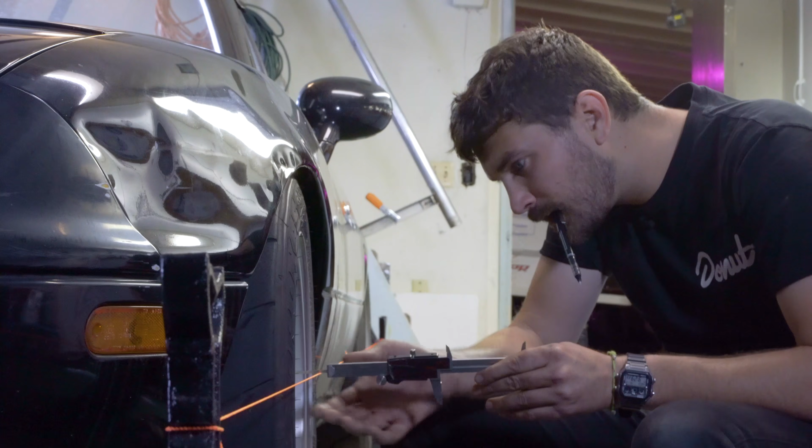It may seem like a pretty small thing, but alignment is so important in affecting how your car behaves. Is it squirrely? Is it darty? Does it pull to the right? Not only that, it affects how long your tires last and how much grip you actually have, and even your fuel economy. A lot of people think that it's really complicated, but it's not. It's actually pretty easy. It just takes a little time and understanding to perfect it and get it just right.

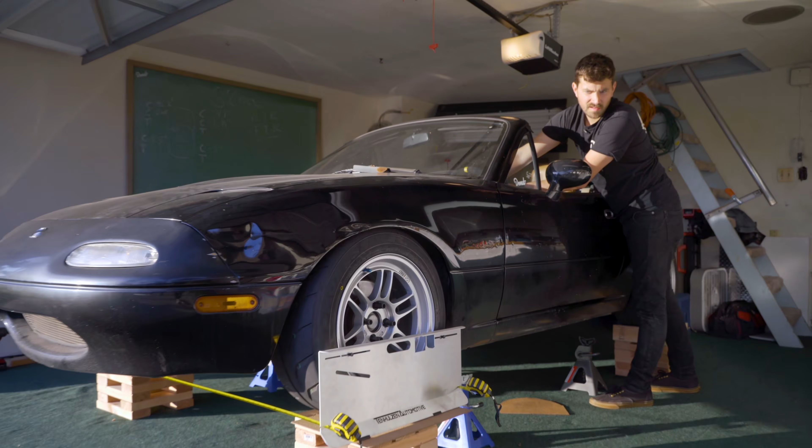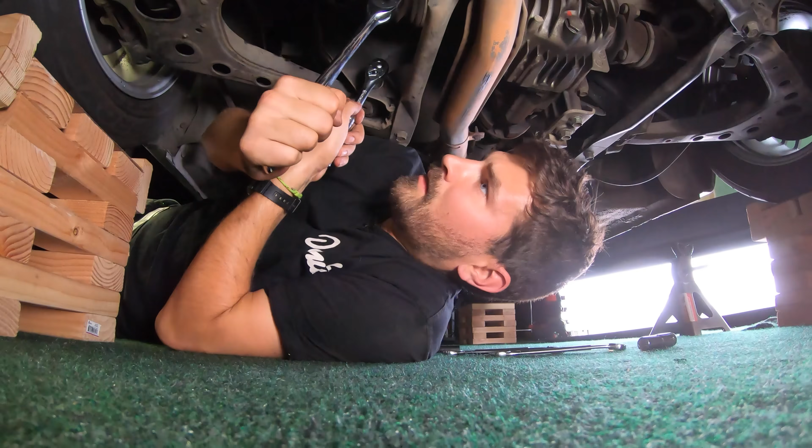So in this episode, I'm going to show you exactly how to do just that. I'm going to teach you how to do an alignment on your own. So along the way, we'll explain the different things that we're adjusting, like the camber, caster, and toe, which I'm sure you've heard of before. We'll talk about why you adjust each and what effect tweaking each one will have on your car, especially in a performance sense.

But I'm very excited because this is going to be a little bit of a learning experience for us both. I've done plenty of in-shop alignments on alignment racks, but this is my first garage alignment, so it's going to be a little bit of a learning experience, and I'm excited for it. And by the end of this video, we're both going to be alignment wizards.

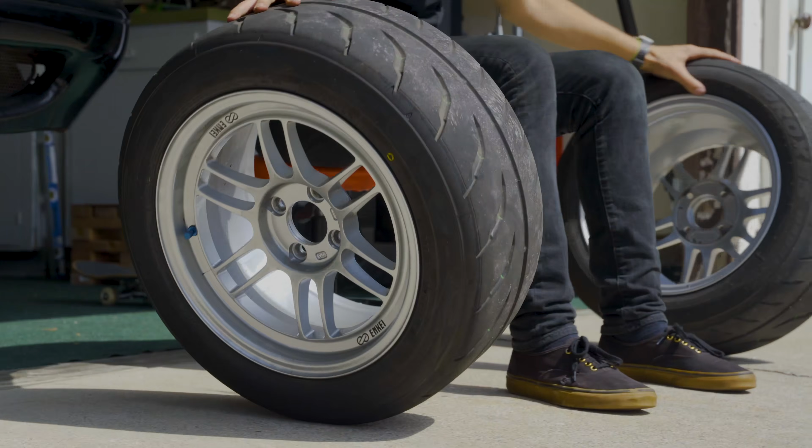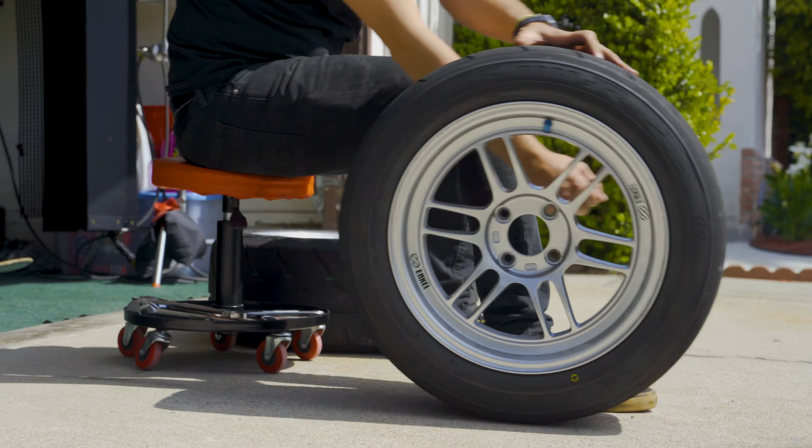All right, so alignment. The basic concept is aligning your suspension to affect the angle at which your tires contact the road. All right, we're talking like this. This is camber. And we're talking like this. This is toe. And then we're talking like this for caster. If you imagine that my arm is the steering axis, or the axis that your steering pivots around, we've got positive caster up front. If my arm's the steering axis, to negative caster. Got it?

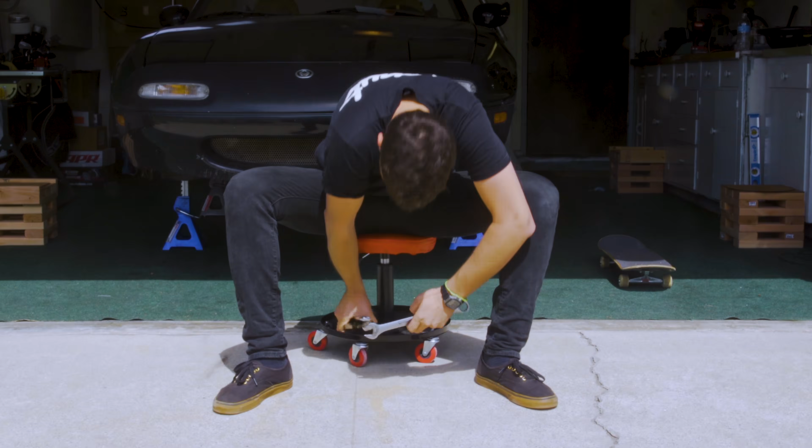Okay, so what kind of tools do you need to perform an alignment at your house? Usually, maybe some sockets and a socket wrench, some wrenches of the regular sort, and an adjustable wrench can be your best friend when you're doing alignment stuff, because a lot of these parts are going to be a little big. All right, so the hand tools are pretty basic, but in order to measure the alignment angles, you're going to need some specific tools of some sort or another.

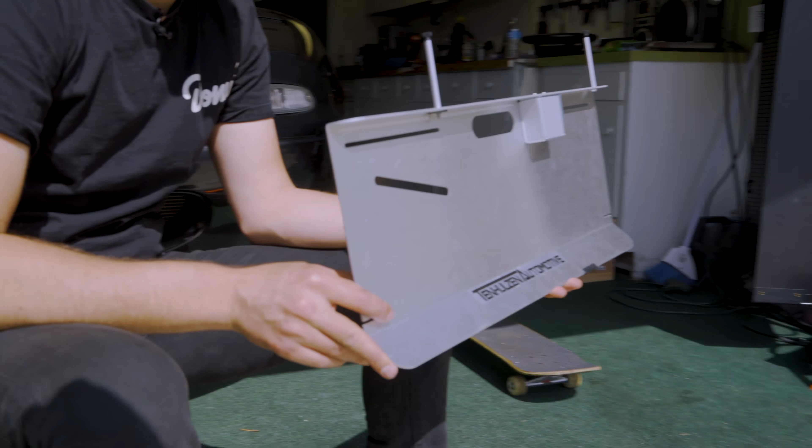So first, I bought these on Amazon. These are camber, caster, and toe plates. So these will measure all three of the alignment angles, and they're only about 200 bucks. So these should be pretty nice. Now, for measuring toe, well, you can make a set of toe plates, or you can also use string.

Something that you need to think about when you're making alignment adjustments is that your car needs to be loaded when you make the adjustments, which means it needs to be sitting on its tires like it normally would be. So how do you do that and get under the car and make adjustments? Well, in my case, I went to the old Home Depot, bought some lumber, and made some stands like this. Pretty rudimentary, but I think they'll do the job.

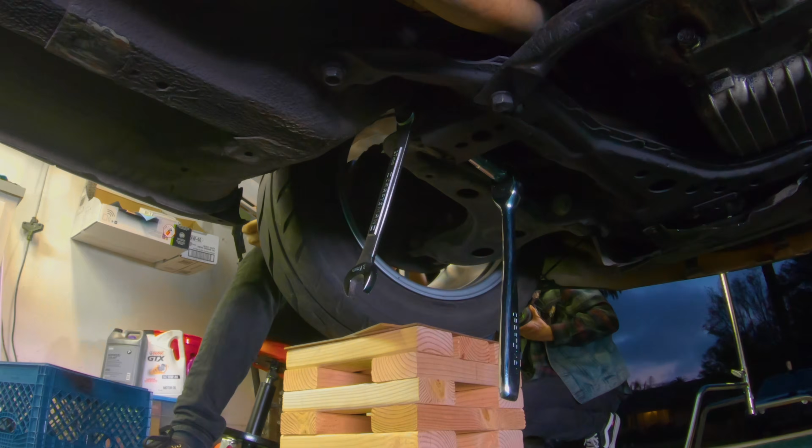And we've got some masonite here, so they're kind of slippy, because the other thing that's important is that your suspension isn't bound up and is pretty free to move. So we're going to put the car down on these. I think we'll do that right now, and then we'll talk more about caster, camber, and toe.

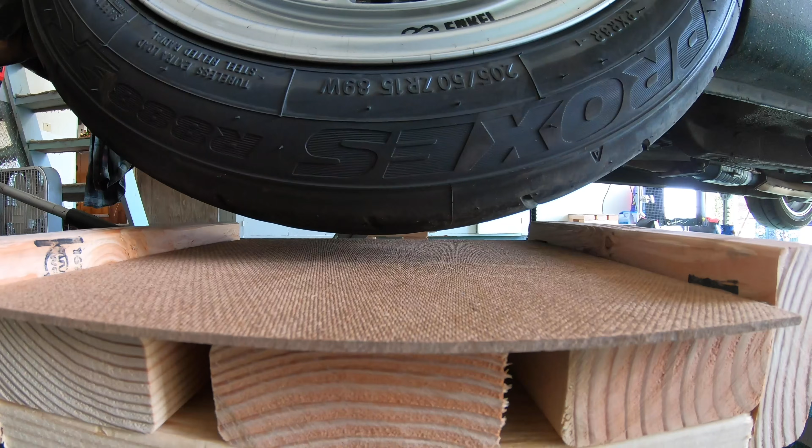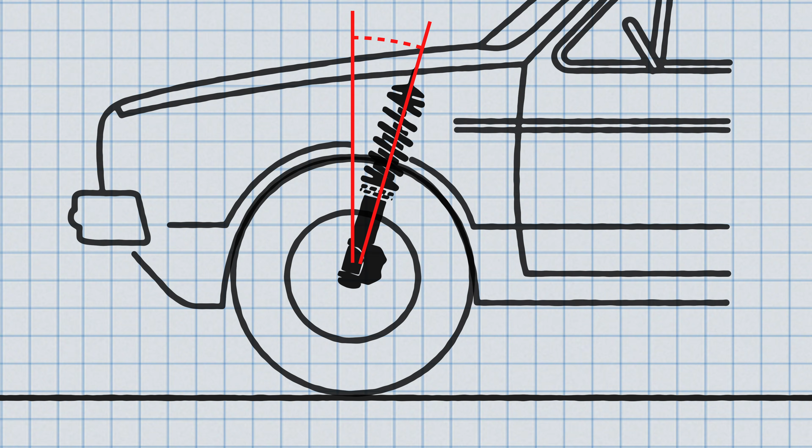All right, let's start with caster. Caster is the backwards or forwards tilt of the steering axis, which tends to stabilize steering in a straight direction. What does any of that mean? So caster angle is the tilt of your steering axis. Okay, so your steering axis is the axis that your knuckle and your wheel and your tire all turn around when you turn your steering wheel.

On a double wishbone car like the Miata, the steering axis is an imaginary line through the upper and lower ball joints, because that's what determines the angle of your knuckle, the forward or back tilt. Got it?

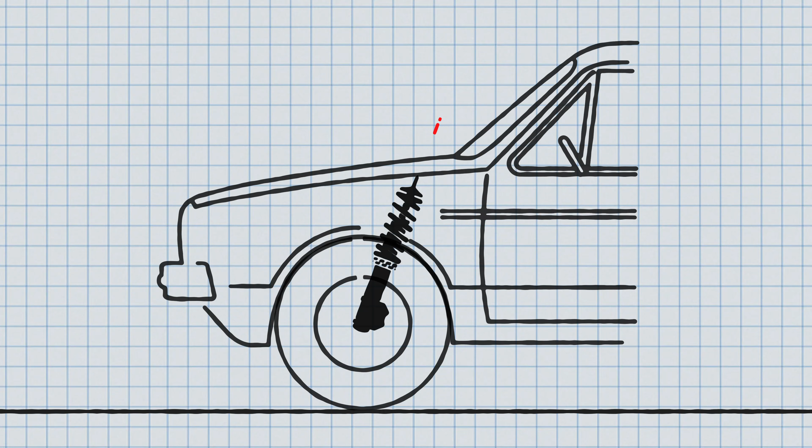So if we draw an imaginary line through the steering axis, we can see that it would intersect the ground in front of the tire. But your tire touches the ground all the way back here. So when you're rolling forward, what that means is that there's a lot of drag back here where your tire touches the ground, a lot of force pulling backward.

And since the steering axis is all the way up here, the force pulling back here, the wheel automatically wants to snap around and rotate that steering axis to pull itself back to straight. So that's why when you take a turn, the steering wheel wants to come back to center after every turn you take. So now that we understand that, let's try to understand how to measure caster.

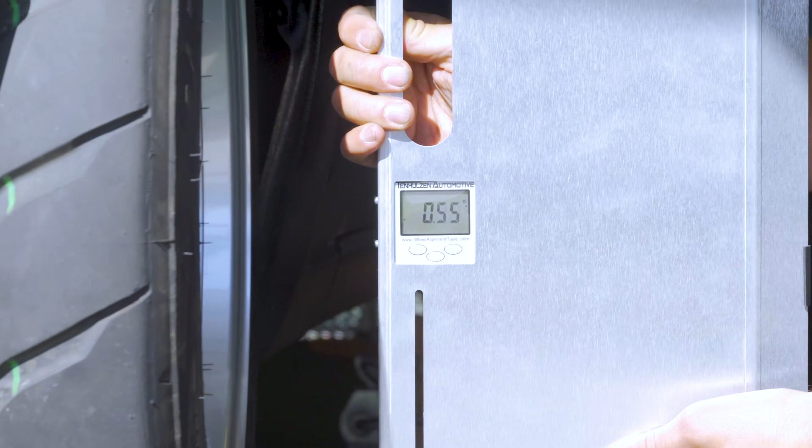To do that, I'm going to use those toe plates. We're also going to have to use my homemade turn plates. We're going to take a measurement at 2 different points. First, for this wheel, I'm going to turn the wheel 20 degrees to the left, so I'm going to set 0 on my plates. And then I'm going to swing 40 degrees back to the right, and then I'm going to take a measurement. Then I'm going to multiply that measurement by 2, and that's going to be our caster measurement.

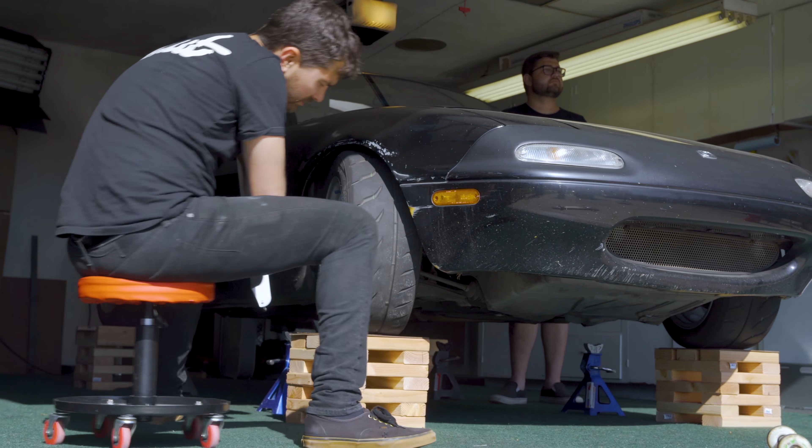Okay, so we have currently 6.2 degrees of positive caster. Awesome. I'm going to write that down, take note of that, and we'll move on. All right, now the right side, same thing. Okay, Saron, turn the wheel to the right, 20 degrees, please. All right, so we've got 4.7 degrees positive caster on the right front, which seems to be a little bit less than that side. Thing doesn't drive perfectly straight right now, and that might be why. Okay, there's no caster adjustment at the rear, so on to camber.

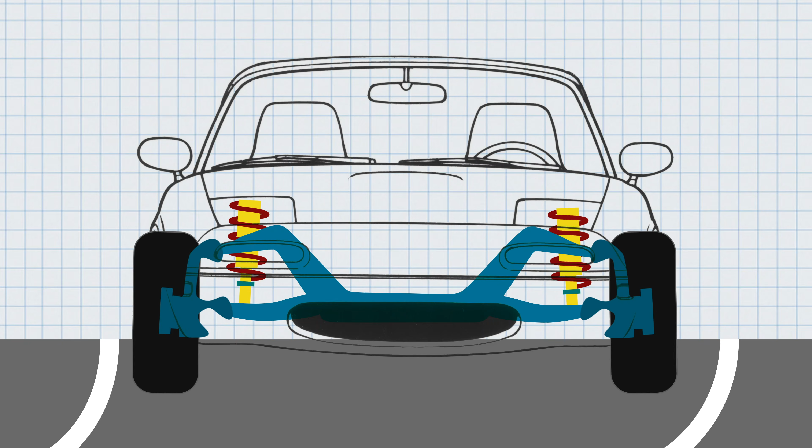So camber is essentially tilting the wheel in or out from the wheel well. When the bottom of the wheel is more tucked in, positive camber, okay? So what is the point of each? Well, beyond just trying to cram your too wide wheels under your fender, from a performance perspective, negative camber is a good thing up to a point. You see, in a hard corner, the outside tire is gonna wanna roll under the car. And that means that your tire's contact patch will be sacrificed, which means your grip will also be sacrificed. But if you add a little negative camber to the equation, then we're perfectly prepared to take that hard corner.

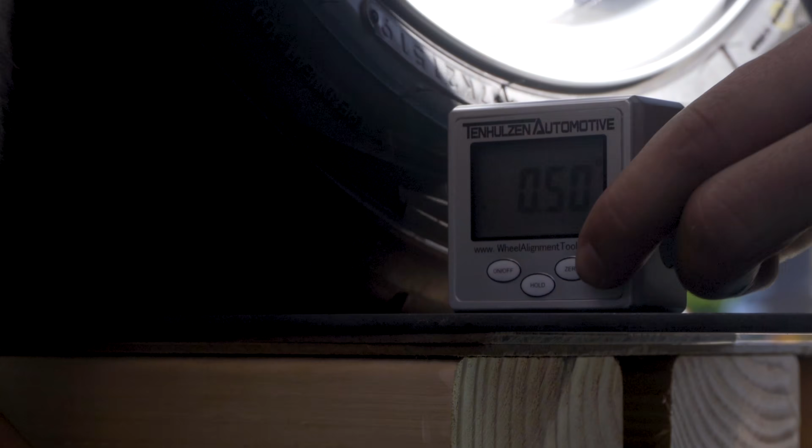Positive camber isn't really good performance-wise, but it does have some benefits. Sometimes big buses or RVs will use a little bit of positive camber because it makes turning them big betties a little bit easier. We don't really care about that in this case, so let's measure our camber as it is right now. To do an alignment, you need to be on a level surface, ideally perfectly level. And this is pretty level. It's very close, but it's not perfectly level. So with the digital gauge, what I can do is zero this thing out to the level that we're on, like on these stands, and then measure camber for an accurate measurement.

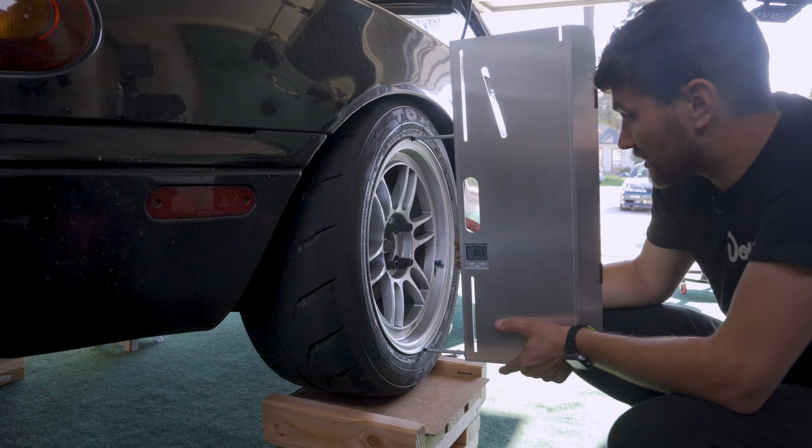Negative 2.45 degrees of negative camber. Let's write it down and keep measuring. So at the rear, we've got negative 3.55 degrees camber. Okay, negative 1.8 degrees camber. 3 degrees negative camber. All right, so here we've got all of our caster and camber measurements written down so we don't have to remember them. Let's keep moving.

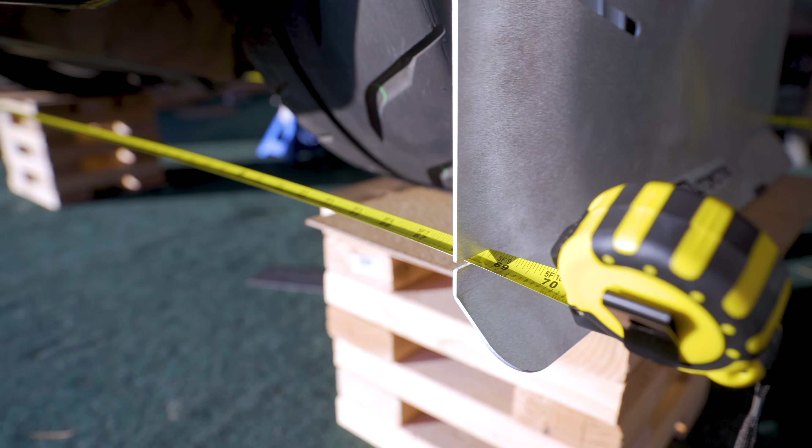All right, let's talk about toe. Toe is probably the easiest aspect of an alignment to describe and the easiest to remember. Just think of your own toes. Point your toes in, that's toe in. Point your toes out, and that's toe out. It's as simple as that, really. A little bit of toe out can be beneficial for increased turn in or steering response because your tires are kind of already ready to turn.

A little bit of toe in will help straight line speed stability. So a lot of performance oriented alignments will go with a tiny bit of toe out. A lot of Miata guys will go with a tiny bit of toe in. I think we're gonna split the difference and go with zero toe, just straight ahead. So let's get after it. So we got the toe plates set up here on the front wheels, and now we're gonna take our toe measurement.

These plates touch the lip of the wheel here, so we're measuring from the wheel again, and then we'll take a measurement from the rear of these toe plates and the front. And then we're gonna figure out our toe, see what it's at currently.

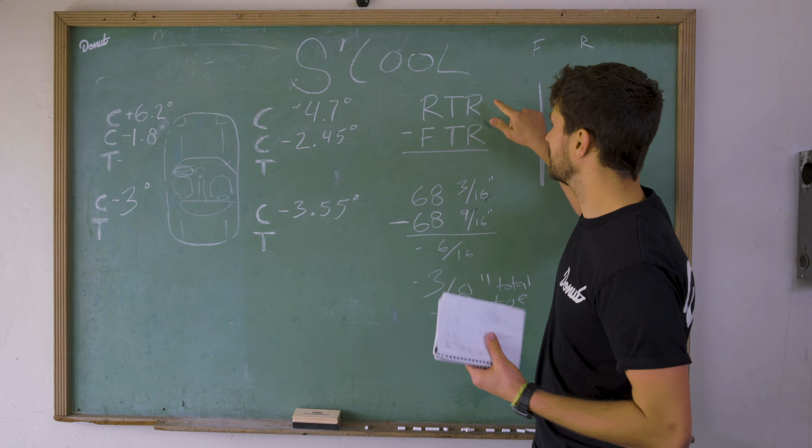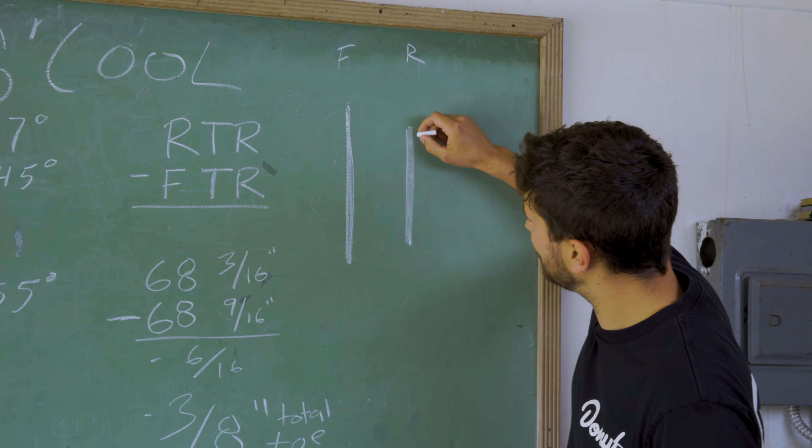All right, so we've got our two measurements from the tape measures on the toe plates, and basically you plug those into this little formula right here. The rear tape reading minus the front tape reading, okay? The front tape reading is a little bit longer than the rear tape reading. So if we exaggerate that a little and think about it from a top-down perspective, our front tape reading across the fronts of the wheels is longer than our rear. So if you look at it like that, you can see that's a toe out condition.

But that is just total toe. We don't know where that toe is coming from, so we got to figure out how to measure individual toe. And I will show you how to do that using some strings, which I think is going to be awesome. But first, let's talk about our target specs and what we're going for here.

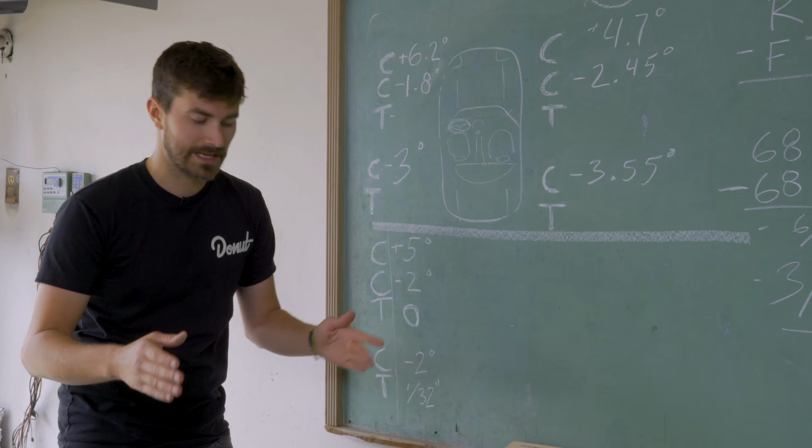So for target specs, this is what we're going with. In the front, 5 degrees positive caster, both sides. 2 degrees negative camber, both sides. 0 degrees toe, no toe, dead straight. Then in the rear, we're gonna do 2 degrees negative camber as well, and then a 32nd of an inch of toe in on each side, so a little toe in on the rear. So that should give us a pretty good, mildly aggressive, yet still drivable and good tire wear alignment.

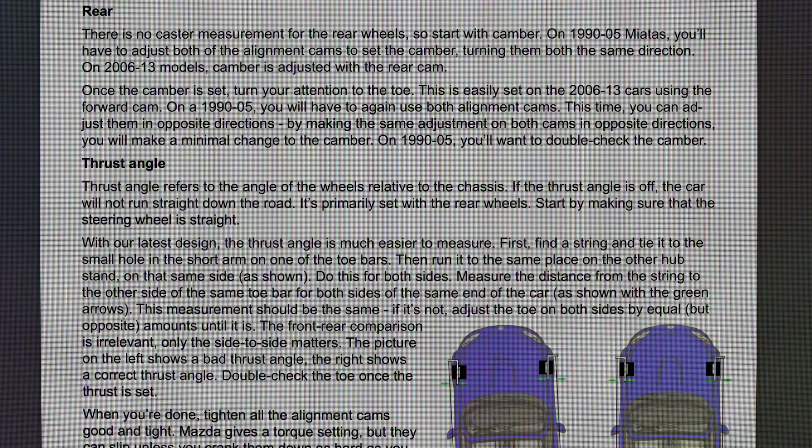But how did I come up with that? How do I know that? Well, I went on the internet. There's a company called Flying Miata. If you have a Miata, I'm sure you're familiar with them. If not, check them out, they're great. They have a lot of good write-ups on their website, including one about doing alignment. And in that write-up, they give you their recommended specs, which are close to these.

I tweaked them a little bit, made them a little bit more aggressive. I added a little negative camber and went with no toe in the front, where they recommend a little toe in. So I think this is gonna be a good setup for what we want for the car, but there's only one way to find out. Let's put these specs into the car.

Okay, so we are ready to make some adjustments to the Miata, which is very exciting, but before we make any adjustments, we need to talk about the order in which we make them, because it matters. There's an order of operations to doing alignments. Adjust caster, then adjust camber, then adjust toe. But if you do toe first and then adjust your caster, the caster change will also change your toe. So, that said, we're gonna adjust our caster. Meet me under the car and I'll show you how.

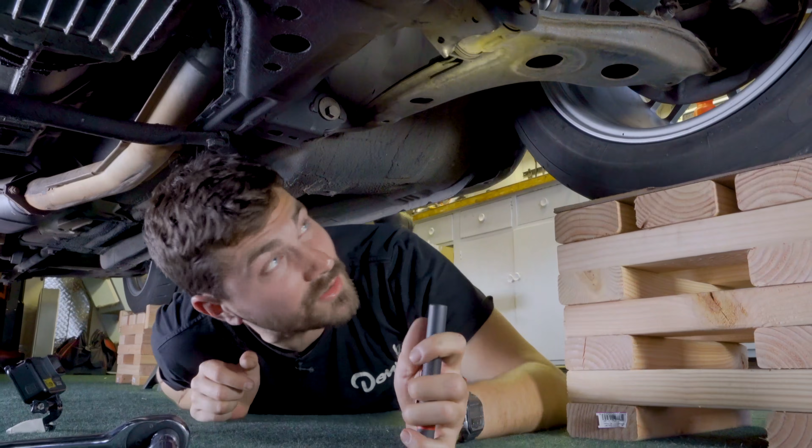Should be pretty easy. Okay, where were we? All right, we're under the car. We're under the car now.

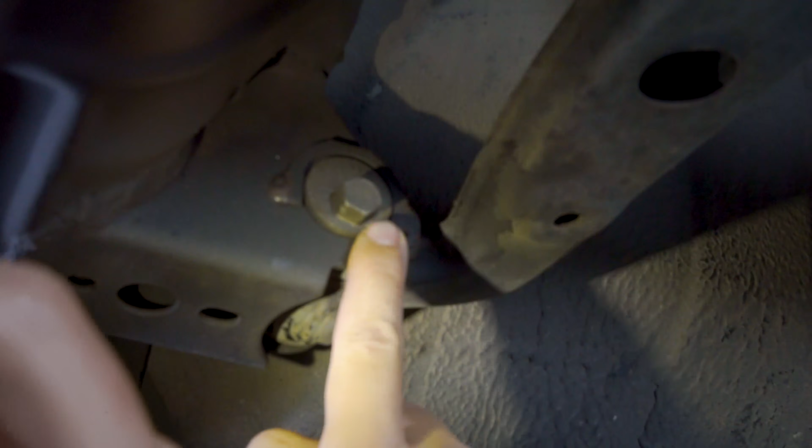Hey, and we're gonna adjust caster, okay? So the way to do that on the Miata is this bolt right here. This is what's called an eccentric bolt, which means that when you turn it, it changes the position of this control arm mounting position. It'll move it in or out, which will ultimately affect the lower ball joint position, which changes caster. Okay.

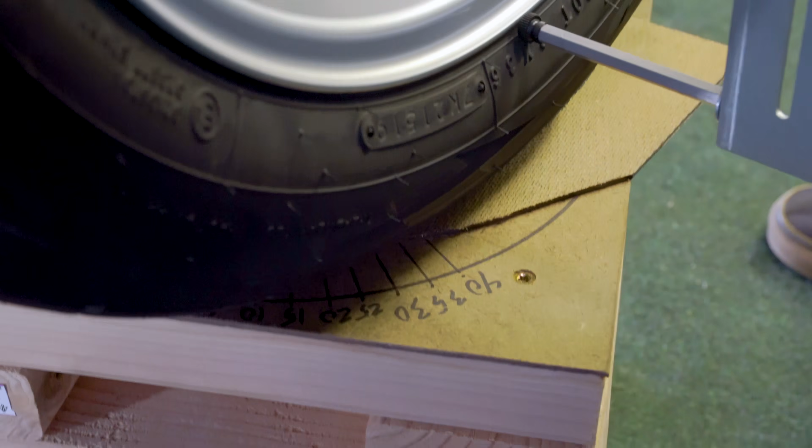Okay, 2.85, we'll take that. 2.85, so multiply that by 2, and what do we get? 5.7, I think it's 5.7. So we're in the right direction. We came down half a degree, but we need to come down another 7/10 of a degree. So same adjustment I just made on this side, just more of it. All right, let's swing that puppy. This is the one, I can feel it.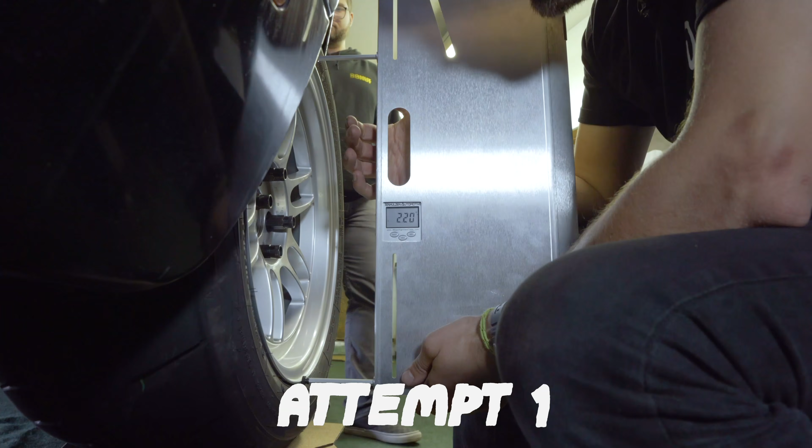2.2? Dude, is that a joke? Oh, I went too far, what am I, stupid?

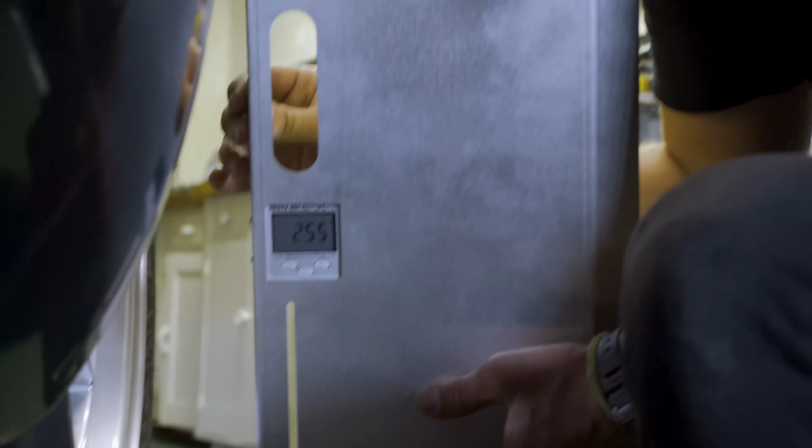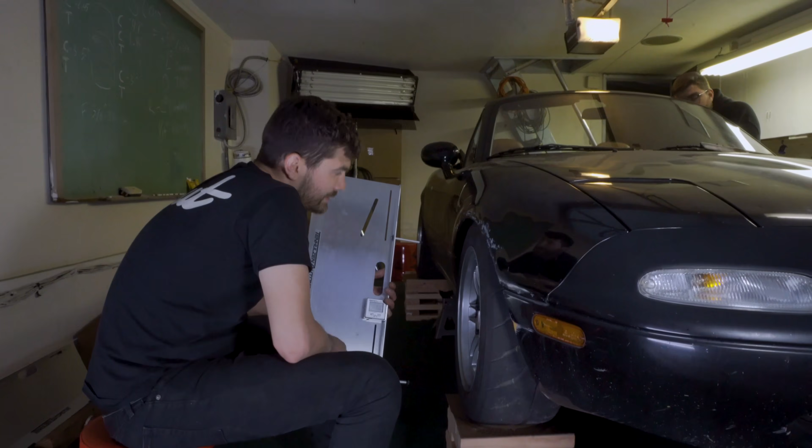I'll take it. 255, so we're at 5.1 degrees. We're gonna go with that. Let's measure the other side and see how that side's going. Okay, surround. 20 degrees to the right, please. More. Yep, okay.

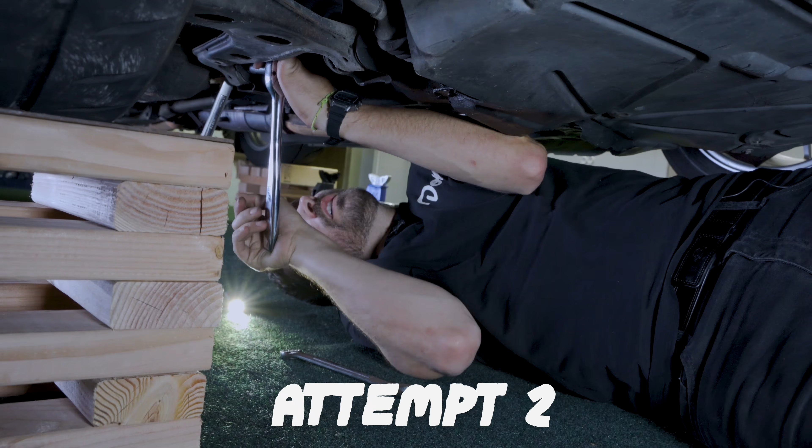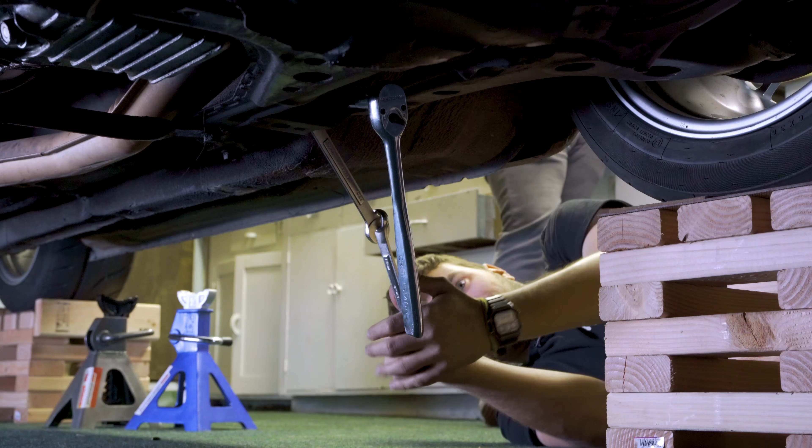One back, right there. Well, it seems that we went in the wrong direction on this one. I guess I can believe that. Keep going. 2.5. It says 2.5, I'll take it. 2.5 times 2 is 5. That's what we're going for. All that side done. All right, so I'm gonna lock down my caster measurement and then we'll move on to camber.

Okay, so now we're getting ready to adjust our camber. We've got the same tools, which is kind of handy because it requires the same tools. It's another eccentric bolt. So this one, as we turn it, it will pull the lower control arm in or out. So we're going to turn our eccentric bolt to pull it back in, okay, to straighten the wheel out a little bit. And we'll see if we can, you know, hit it first try.

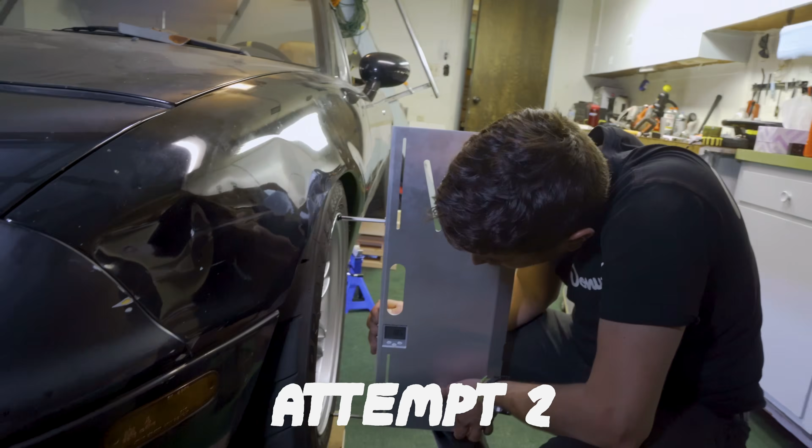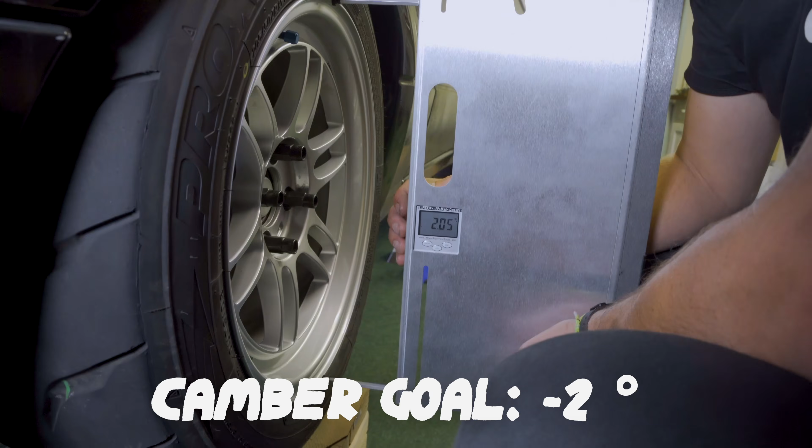Okay, so we made a little, too far. Ooh, daddy. I would really like to see a 2. Just do a DIY alignment. We're gonna take that. That's just fine. That's just fine. To the other side, huh?

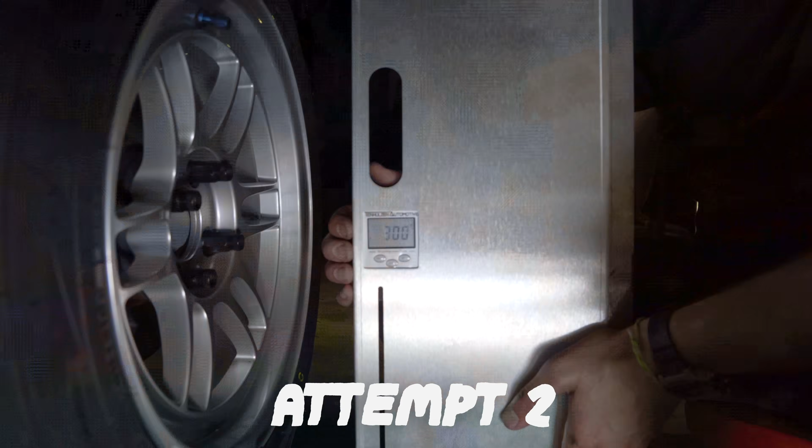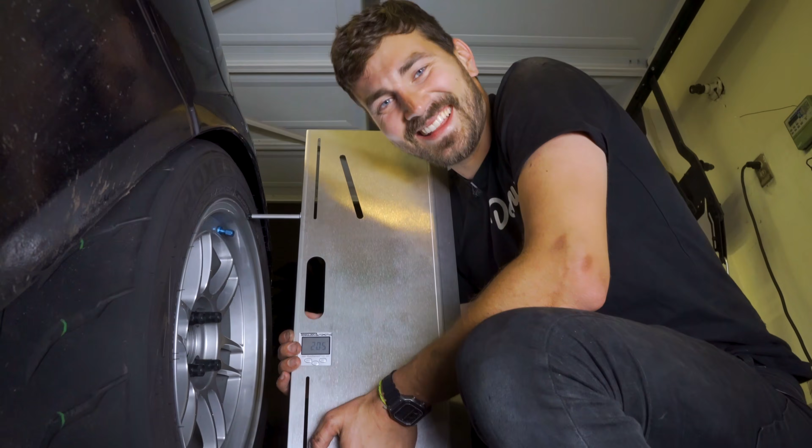What, did we go too far? 270, what did you do, nothing? Dude, give me a break. What? I literally don't. I don't know how that happened. We'll take it. All right, let's do the rear camber.

All right, so now we're at the rear of the car. We're gonna make our first adjustment back here. So we're gonna do that by adjusting these 2 eccentric bolts. Basically, to move them out, you get more negative camber. Pull the bottom more in, you get more positive camber.

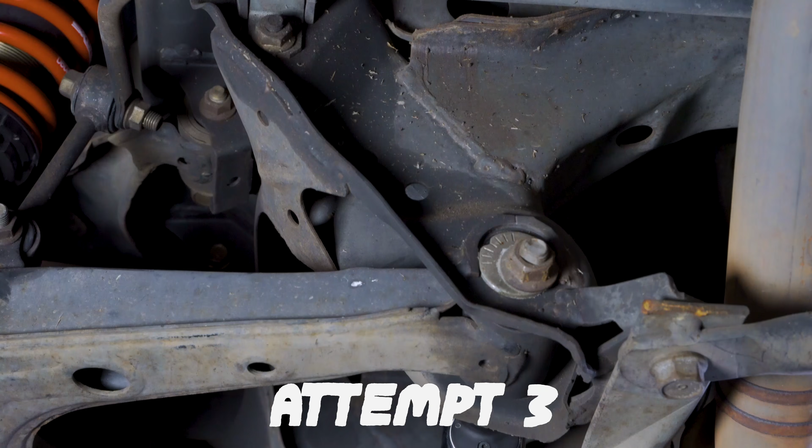2 flat, 2 on the dot. 2.1. We were shooting for 2, but that's as low as she's gonna go. Okay, let's do the other side. What do you think? I love it when a plan comes together. Okay, so that's caster adjusted, and that's camber adjusted. Now we gotta figure out toe.

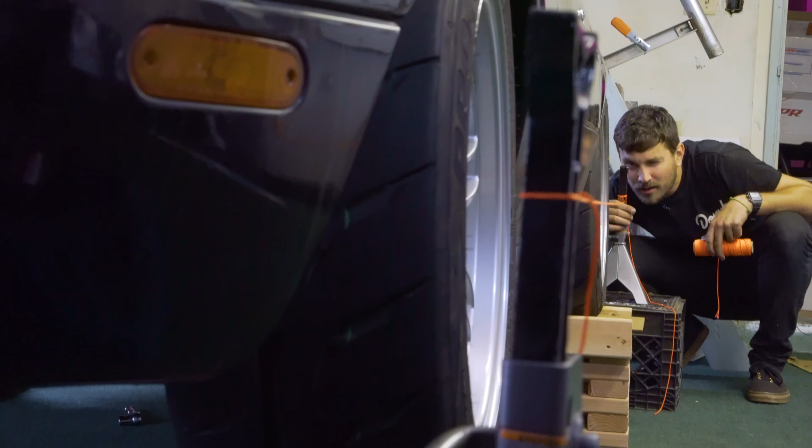All right, so to adjust toe, what we're gonna do here is set up a string box. Pretty simple in theory, we just need to build a perfect box around the Miata with string, and then we can measure from the string to the wheels, to the front and the rear of the wheels, to see what our toe's looking like and adjust from there. So we've got our strings set up, but how do we get them square to the car?

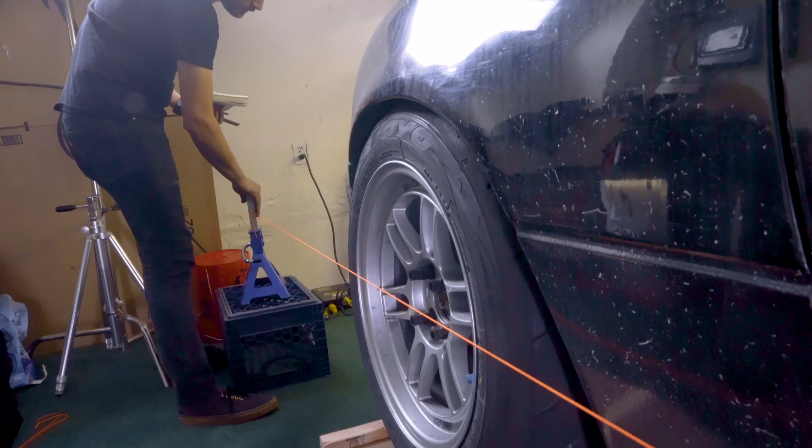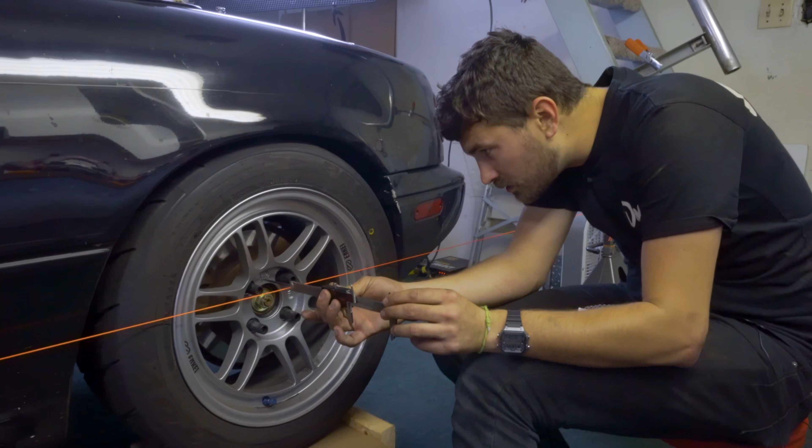Well, right here I have the track width for the Miata. So the front track width is 55.5 inches, the rear track width is 56.2 inches. That's important because the rear track width is a little bit wider than the front. So for the string to be square, the string needs to be 0.7 of an inch closer to the rear wheels in total, or 0.35 of an inch closer to each rear wheel for it to be square.

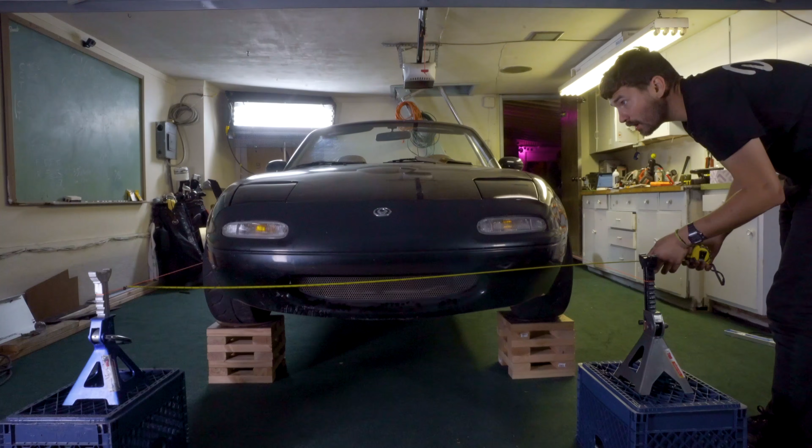Precision measuring milk crates, okay? All right. We've taken our measurements from the wheels. Now we're gonna measure from string to string. And if those measurements are the same, front and rear, then we got a box, baby. Gotta not pull that string right there. Oh, buddy, 66 3/4, dead nuts. We got a string box and we're ready to adjust some toe.

Okay, now we've got our strings all set up and we're square. Now we can take a toe measurement and then adjust. And from when we took that toe measurement earlier, we saw that we had some toe out. And it's visible against the string. You can see that there's more room between the string and the back of the wheel than there is at the front. So the wheel's pointed a bit that way, and it's the same on the other side.

It's also important to note that we've got the strings running through about the center of the wheels because you want to measure toe from opposite sides of the wheel. So now what we're going to do is take this measurement from the string to the wheel and from the string to the wheel, and then we're going to adjust and try to get those measurements equal, make them the same, and that's how we'll know we have a perfectly straight zero toe wheel.

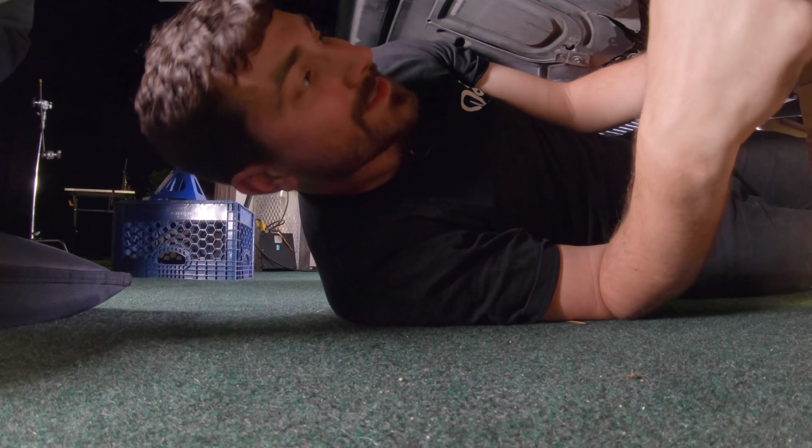To adjust the toe, we need to adjust the tie rod ends, and to do that we need to break this jam nut loose, and then we can spin the shaft, which will push the knuckle that way or pull it in.

Now let's take a look at things and see if we've affected any change. 0.78, so we're at 0.70 here. So, okay, cool, we're close. Now I'm going to bring the toe back out a little bit and even it up. It is important to note that while you make any toe adjustments to the front, you've got to make sure your steering wheel is straight, or else, well, come on, back under.

Ding, ding, ding. Okay, we're at 0.71 away from the string on both sides. It doesn't matter what that number is, it just matters that they're the same. That means that we're straight with the string and we know the string is straight. So that means we've got no toe in this wheel now.

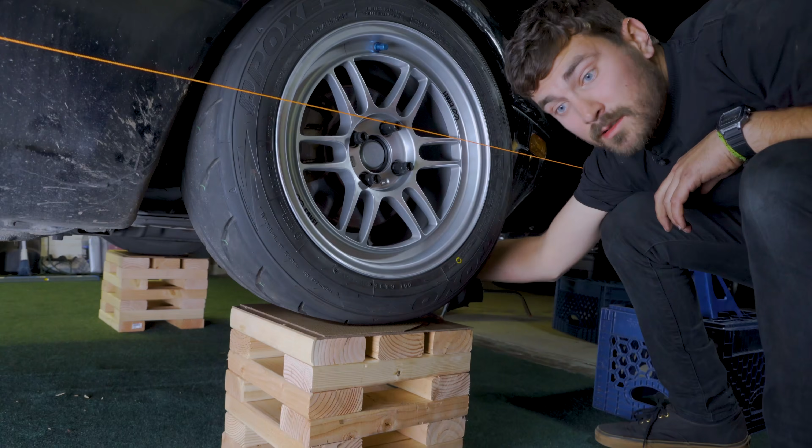Onward. Now that we're in it, this is kind of the easiest adjustment to make. And often this is what you get when you go to a shop for an alignment. On a lot of cars these days, caster isn't adjustable and often camber isn't either. So on a lot of newer cars, especially front wheel drive stuff, you'll just find toe to be the only thing you can really adjust. And it's honestly pretty easy to do at home.

Ow, that part of my hand feels real weird now.

We'll take it. That's zero toe on the front. So now our front wheels are aligned. Now we've got to do toe on the rears, which is not quite as easy to adjust as the front because there aren't just tie rods. It's adjusting those same eccentric bolts that we used for camber. So let's go do it.

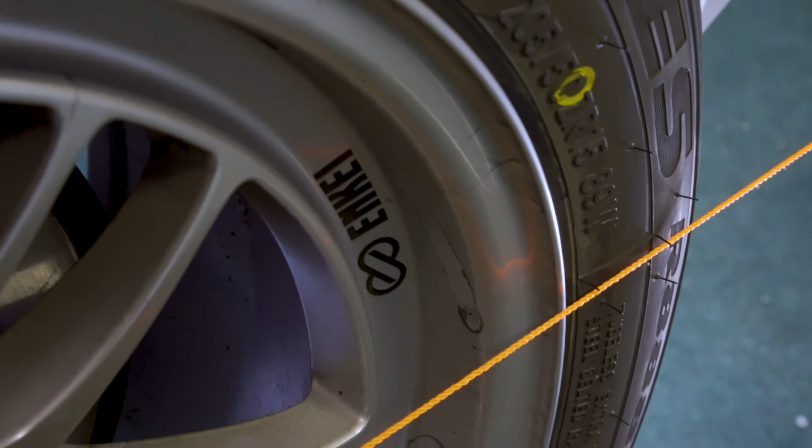Okay, so this wheel is now aligned. So we've got a 32nd of an inch or 0.8 of 1 millimeter toe in on this rear wheel. Now we need to do the same thing to the other side, and then we're done. Now that should be pretty freaking close. Come on, baby. 0.9 of a millimeter. I'll take that. I think that's it, finally.

We're gonna have to tighten all our bolts, make sure everything's good and tight, very tight so nothing slips. I'm gonna paint mark all of the eccentric bolts too so we can tell if anything does move. I think that's gonna do it for tonight. The next thing we need to do is go for a test drive, and I'm gonna do that tomorrow because it's late.

Well, it took a lot of work, a lot of guess and check, a lot of trial and error, but the car goes straight down the highway and it feels great in the twisty stuff, which is a lot better than it felt before. Feels nice and balanced. Left turn feels identical to a right turn now, which is great. It feels like me and the car are really starting to communicate, so that's nice.